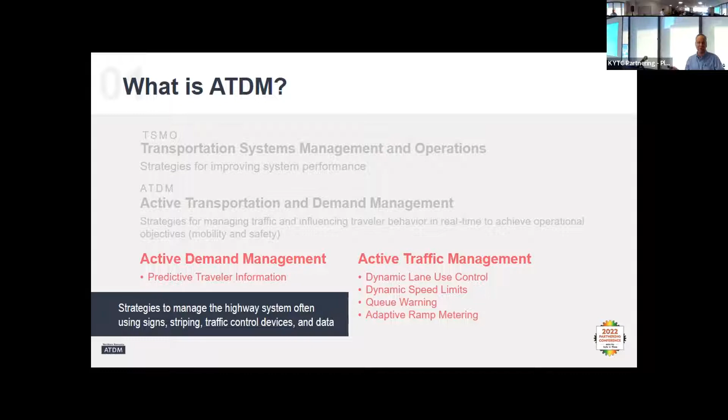Who in here has heard of TSMO before, at the very least? Excellent. Who has heard me or Sawala talk about TSMO? Okay, the message is getting out.

This is very exciting. So the overarching question of why we're doing this can kind of be distilled down into the Department of Highways' operational goals, which is to promote safety in all decision making. That's what we want to do in every aspect of the Transportation Cabinet's work — increase our economic opportunities and the quality of life of the traveling public. We want to have a relationship with the people who are using our roadway system. That's usually a benefit, but we want the roadway system to perform well.

We don't want it to be underutilized. Some of our segments are overutilized. Does that all make sense? Why this kind of stuff is important? Okay.

One of the other biggest problems we have is that we have limited resources. And we're kind of boxed in a lot of different ways, especially on the interstate system. Anything we do on the interstate system tends to be more expensive. And we are, in certain areas, very boxed in by right-of-way or other constraints that make potential solutions like just adding more lanes not very feasible.

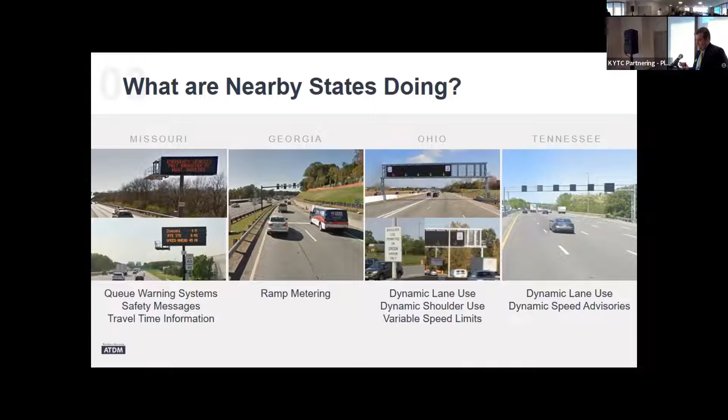You get fancier as you get into Ohio and Georgia with ramp metering. The I-670 smart corridor there in Columbus has these really fancy, expensive overhead gantries in the middle that tell you what the speed limit is, what lanes are open, which ones you can use. They also have things like variable speed limits, dynamic lane use, and speed advisories.

Now, like I said, Kentucky's got some exciting things going on in this space. Did anyone listen to Jason talk about the TSMO program plan this morning? Hands, please. Awesome. So you can see that this kind of thinking is really starting to ingrain itself into the KYTC process.

Also, this highway plan has approximately $7 million per year in various funds for TSMO and ITS, Intelligent Transportation Systems, which is a dedicated pot of funding for TSMO. That was something that really didn't exist before.

Of course, we have deployments already with our travel time displays, both run by TRIMARC and run by KYTC. We've got this study that we're doing, and we're really starting to integrate TSMO into project thinking, both in the planning phase and also in the design phase.

There was a request for: can we look at a reversible lane on an arterial? Can we do a managed lane on an arterial? We have queue warning systems, and intersection conflict warning systems come into this as well. So big projects, little projects, this TSMO stuff is coming into it.

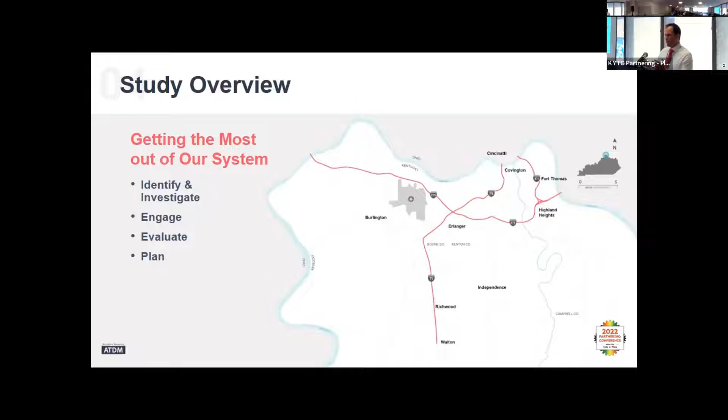Northern Kentucky has a unique situation where there are a lot of small patches of cities right along the river, so having them included was important. We evaluated some of the options and potential benefits, and identified the plan for what the next step is—what's the easiest thing to do today?

Then you get into construction, and after construction there's a whole bunch of testing and integration you have to make sure is going on. It's got to work, it's got to do everything you said you wanted it to do, and you have to verify along the way. It's not as simple as putting pavement down, turning around, and seeing what happens.

Some of the goals we had for this study: reduce travel times, reduce crashes, improve travel time reliability. We're really looking for a favorable benefit cost ratio so we can show why we need to continue investing more into these strategies.

The considerations we had to be careful of are the physical infrastructure—what's actually out there in the system from a connectivity standpoint, communications, power, existing infrastructure—and how much money we have. You can't just put this in, walk away, and come back in 15 years and say the pavement condition's still good, we're good to go. This is a daily thing you have to be on top of, thinking about, checking on, and making sure it's still doing what you intended it to do.

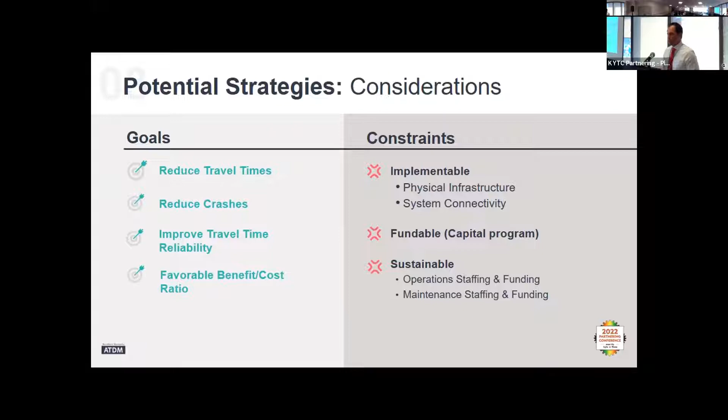Now I'll run through the range of potential strategies we looked at. The RFP had a pretty long list that we tried to narrow down—I called it everything but the kitchen sink when I saw it, and hoped we didn't have to do everything because it might not make sense. But we used that funnel and moved it down the process.

The first one was dynamic shoulder use—using electronic signs to dynamically utilize the shoulder for a travel lane. Normally this is done in peak period conditions, not all the time; it's really just when you need more capacity. But you need to understand how you're going to do it—is it going to be a smart lane with a dynamic sign, or a static sign?

We have an example from Georgia, where they have a static sign that opens the lane from 8 to 10, and then again from 4 to 6. Over in Washington, they have a dynamic lane use with a green arrow, red X type system. All of these require similar things: communication, power, and thought on where they're placed along the system. You have to give people enough time to make an informed decision and do something about it, so you can't just throw these everywhere.

You have to think about how much time people actually need, how much spacing there is before they need to make a decision, so it's something people can do comfortably—because this is a lot more information being thrown out there. We try to make it as seamless as possible, but that can be a challenge, especially in some urban corridors.

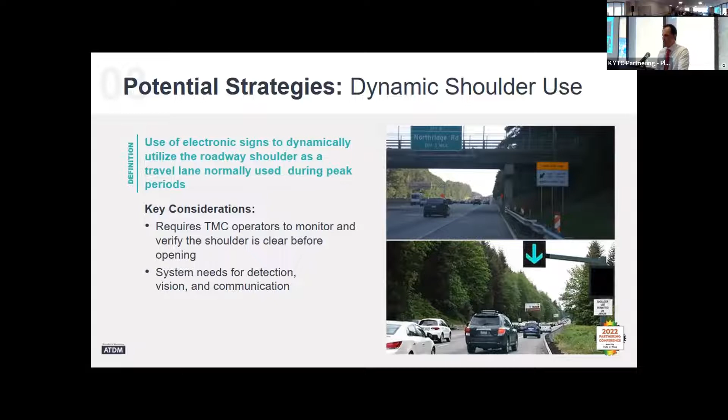Ramp metering is another one that uses traffic signals to basically break up the flow of vehicles entering the freeway. It creates a safer merge condition and can just help smooth out vehicles entering the freeway and the flow. I like to talk about ramp metering.

Just think about the plumbing inside your house. You can't put too much on at one point. You have to make sure that the system can handle what you're putting into it. The whole point of ramp metering is making sure that you're monitoring what's going in, how it's going in, so you don't have a backup.

Some of the biggest concerns with ramp metering that you have to be aware of are the geometrics that come with it. What's your acceleration distance? What are your required acceleration distances? Hint, the Green Book requirements are not exactly what you need to be doing when you're thinking about ramp metering. So look at what a peer state has done. There's a lot of states that have gone out there and come up with their own acceleration distances that are needed for installing ramp metering.

The discharge, how many lanes do you need? You really have to understand how many cars are coming onto the ramp, and it's not at an ADT level. It's at a 15-minute, 5-minute interval. You have to know when they're coming, how many are coming, so that you can control the situation.

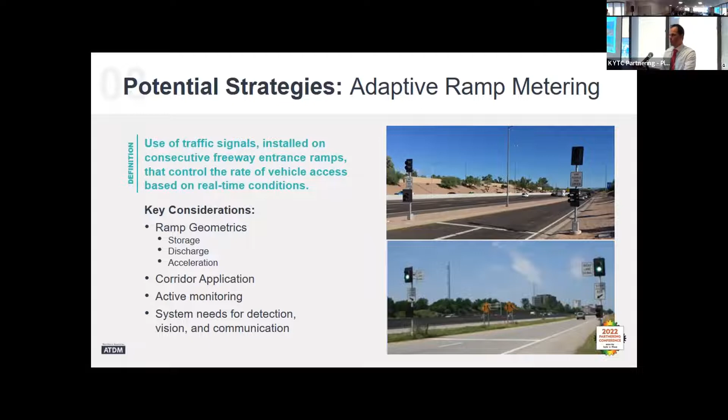And then corridor application. The biggest thing that I see is a lot of people think, oh, well, I can just put ramp metering in a couple spots. You really got to, it's a system-wide approach. So you want to look for an opportunity to apply it across the system so that you can gain that benefit of moving people along the whole system. And again, communication, vision, cameras, and power are all things that you got to look at right away for this type of system.

Dynamic lane use control is another one that we had, and it's very similar to dynamic shoulder use, except it's really monitoring and providing information above each lane on the freeway. So where this really comes into play is if you have an incident blocking a lane, providing people with the information a couple miles in advance, and every mile or so as they're approaching it, or half mile depending on the spacing, is going to allow people to get over and out of the way instead of just running into the back of the incident.

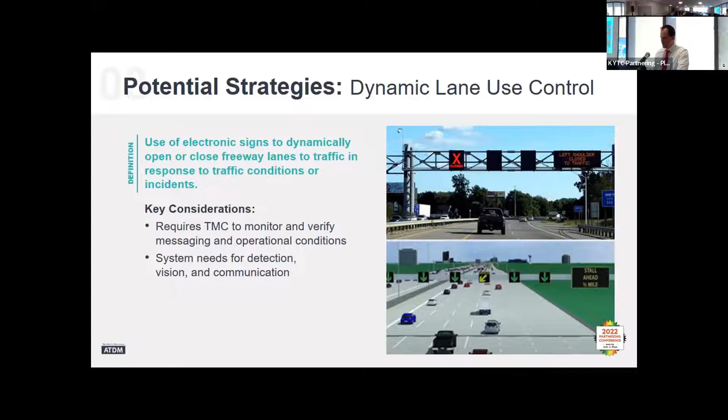In certain jurisdictions, they also include speed, and that's another one we're talking about two from now. So queue warning is the other thing, is just using the signs that you have out there to let people know, hey, there's an incident, just be aware.

Understanding where these are placed. Again, you don't want to have one of these every 20 miles ideally, because incidents happen along the way. It's really critical to understand the level of deployment that you need to have in order to get the message across to actually make a change for the safety of the system.

This is another thing that we looked at, and the common trend you might be seeing here is, man, Chris, Rob, you guys are telling us a lot of stuff that includes a DMS, fiber and power and communication, maybe some cameras that verify things. That is a lot of what we can do to lay the foundation and build from there.

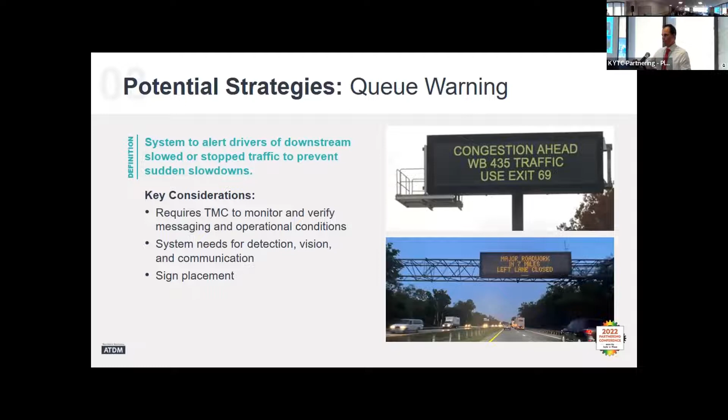The dynamic speed advisories, another one that we looked at. The point of this system is really just to mellow out flows along the freeway. It's another way to tell people, hey, there's a change in the condition ahead. There are also two types of these advisories. There's a dynamic speed limit, which is controlling and could be enforced if you had legislation. There's also the advisory piece, which sometimes comes in from a road weather management situation.

If you had a curve, or maybe a really steep downhill slope on I-75 going into a river, letting people know, hey, slow down. The conditions normally are, 65 is fine, but it's 9 o'clock. Let's really target 45 miles per hour because there's just so much going on.

So again, same thing here. It's all about placement. It's all about communication, power, and just thinking through where you put these signs.

Another one that we were looking at was comparative travel times. One of the really nice things about both Louisville and Cincinnati is the options that you have available.

There's interstate options, and there are also significant arterials that run through these regions that you could use if you had an incident on the freeway. So providing that information and really looking at what are the normal travel patterns, what are the alternative options that could make sense. These types of signs are really about getting information out to the traveling public, letting people make an informed decision. That decision might be, I need to turn around and work from home because I don't want to drive 60 minutes to get across the river.

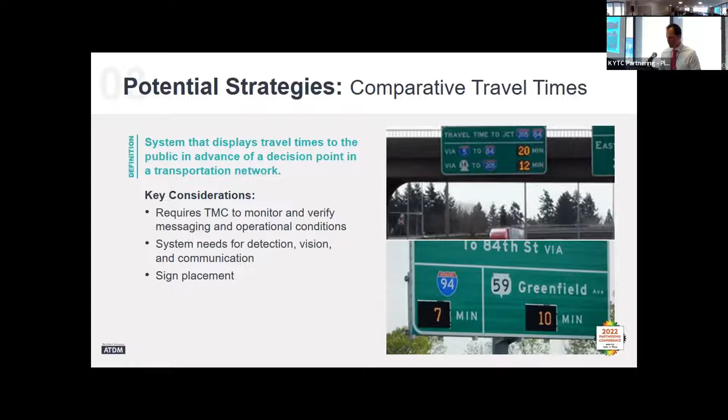So of all those strategies, and a couple others we had, the ones that moved forward were the comparative travel time, the queue warning, the dynamic shoulder use, and the ramp metering.

The ones that were limited were the dynamic lane use control and the speed advisories. The reason for that is some of those limitations—mostly the dynamic lane use control and speed advisories—require a significant amount of infrastructure we don't currently have, from overhead gantries at half mile to three-quarter mile spacing, depending on the policy decision. It's just a lot of money.

But what we do have currently in the system is some DMS out there. We're used to working with them, and we've actually got some pilot projects that TRIMARC's been working with from the queue warning system on I-75. So we're really looking at identifying things that could easily grow from there.

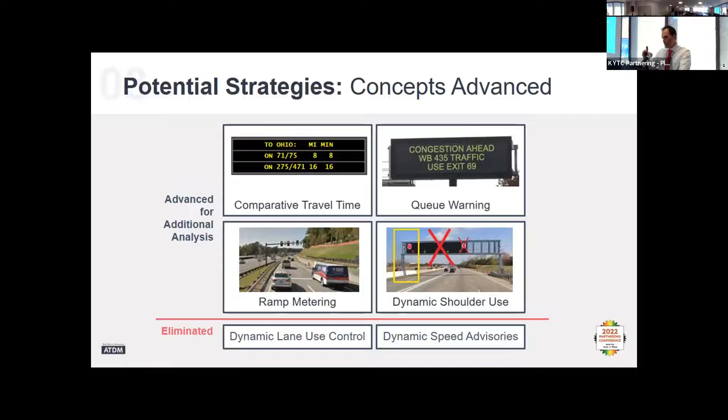But the biggest thing with this study that's very different from other studies—and actually very similar to what the previous presentation was on with HSIP—is the amount of data and the level of data you get into when you're looking at these types of things.

Again, ADTs are not going to work when you're talking about an operational condition in a peak period. We've got to get down to, like Steve was talking about, the big data. We can see at two-minute intervals right now with the probe data we have an identification of, hey, we've got a problem. For right now, we can use that if we can integrate it into our ATMS to provide information to these signs, and that will give us an immediate benefit.

What do we need to do right now? We just need more signs, in the right spots, and we need to be able to expand the demonstrations we already have. When that provides benefit, it's a lot easier to say, hey, this has worked really well—here's the benefits we have.

We have fewer secondary crashes. We have better travel time reliability whenever 75 does get shut down, because people don't just go to 75—they use 471 and 275, or the streets in Covington and Newport. So these are the types of things that, using the big data, understanding what's happening, having that baseline information, but also really looking at operational data when you have an operational issue you're trying to fix—that's a little different than your normal traditional corridor planning study.

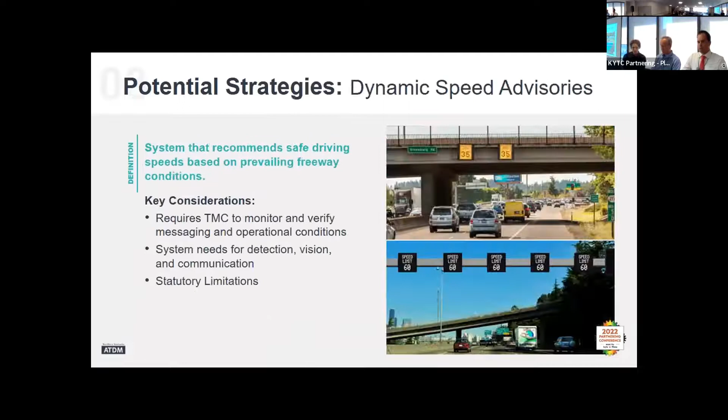Another thing that Jason talked about, which I think is critical, and why we've kind of taken the approach that we've taken through this study, is credibility. When you're putting in a system, having the system be credible is critical to people actually using it and changing their behaviors based on it. So that's one thing we're looking at: let's expand what we currently have, what we know works well, and just put it out there more, so we start that baseline of what is credible and what's working.

You can think about your questions and I'll answer them later. Thank you. Yep. Thanks for that.

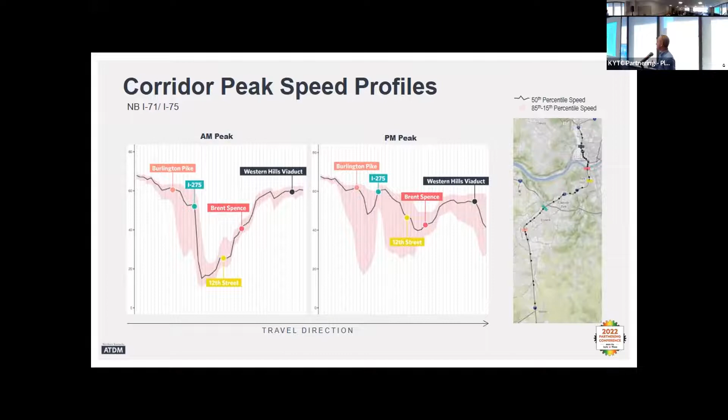All right. So yeah, we've talked a little bit about the data, and there is the data that we use, and there's the data that would run the systems. This is some of the data that we use. We use speed data that shows speeds on the approach to the Brent Spence, morning and afternoon. In the morning, it drops off, actually increases as you approach the bridge. In the afternoon, you see there's big pink bands, which shows that it's unreliable. You really don't know what you're in for in the afternoon. It could be that you're going to go 60. It could be that you're going to be down at 30 or 20.

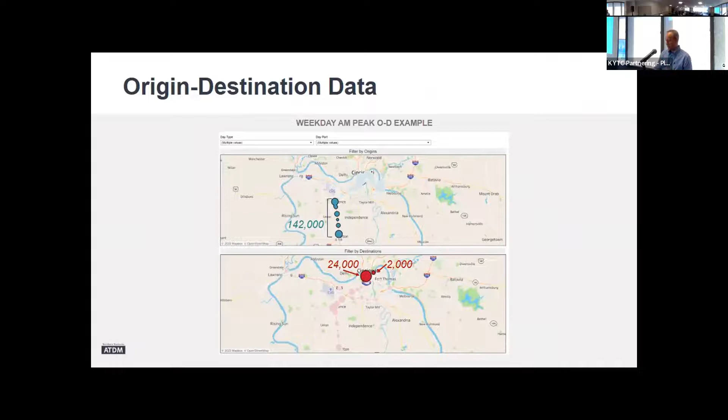So we looked at that information. We looked at various maps. We looked at where all the crashes are. We looked at origin destination information, which is now even more available here in Kentucky to us, which is fantastic. So how many people actually do what Chris was just talking about? They actually divert over to 275, 471 instead of going over the Brent Spence. And we have all of that information, and that factored into the analysis, along with a lot of other things that we won't go into all the details, but feel free to ask questions at the end if you're interested.

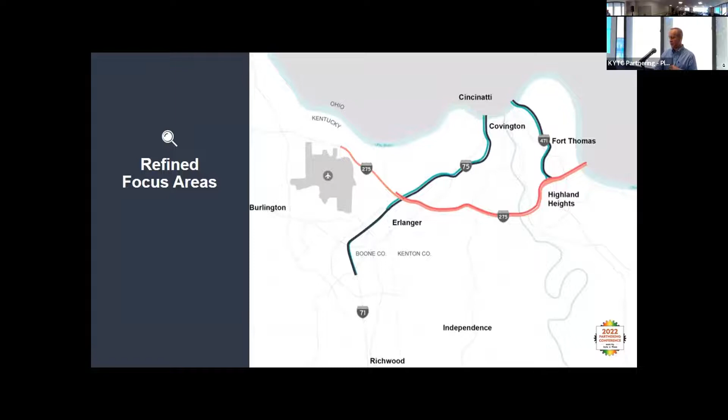And that focused us. We were able to focus: okay, this is the part of the system we really need to pay attention to. This is where we can make a difference with these kinds of deployments, working with what we have out there already, and kind of building on that.

And this is the deployment that we ended up examining. And it is not super complicated. It's basically 4 mainline dynamic message signs on the approach to the 275 interchange, and then some arterial dynamic message signs before you get on the system, so that they can also give you information that would be useful in making routing decisions. And in particular, all the orange locations, the main line, and then the interchanges near the system interchange, those would be a phase 1. That's where we really want to influence people's driving behavior. And we looked at that origin destination information to find out more, and we were able to make some reasonable assumptions about how we could influence people's behavior.

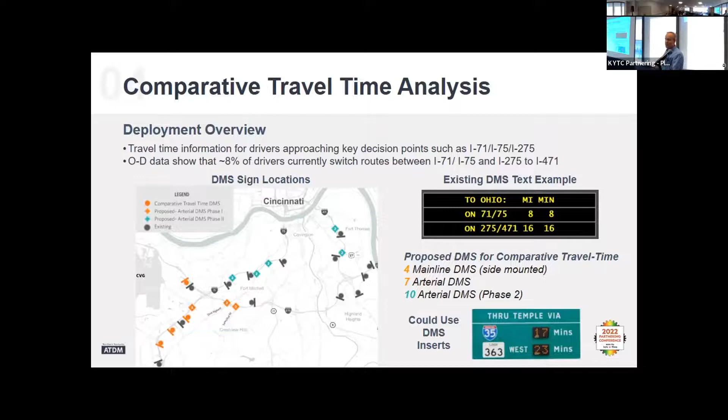And we also show that this can be done using full dynamic message signs, upper right, or you can do something that just has inserts, much lower cost. So we've assumed for this study the high cost; you could do it much less expensively than I'm about to show you, and get an even better benefit cost ratio than the 8.8 that we've already got. And we tried to be conservative when we looked at all the benefits that we can get from communicating this information to drivers. And we really just focused on peak time, really the AM peak, but there'll be benefits all the time, whenever there are incidents at various times, when you don't really know what you're expecting, again, in that afternoon time period and even on weekends.

So from a feasibility standpoint, this deployment doesn't require any right-of-way. The data is already available. It's like Chris was saying, it's signs, communication, power, basic stuff, so that we can communicate with our customers better about their options. And the cost is a little over $3 million, and we think that there's substantial benefits. We looked at 10 years of benefits. We think you're basically going to recover it in a year or 2. It's not going to take long to recover that. That's why you get such a high benefit cost ratio. So that makes sense to move forward. And again, we used the high end cost for those. It could be even lower.

All right. So queue warning is the next thing that we looked at. Oh, I want to just say, so this is already being done up there, but right now, what happens is when there's congestion, the message board that displays this information switches to safety messages.

And so it doesn't show the message when you kind of need it most, because it's got a higher priority safety message that it needs to display. And so what we're trying to do is we need to have dedicated signs for this particular deployment.

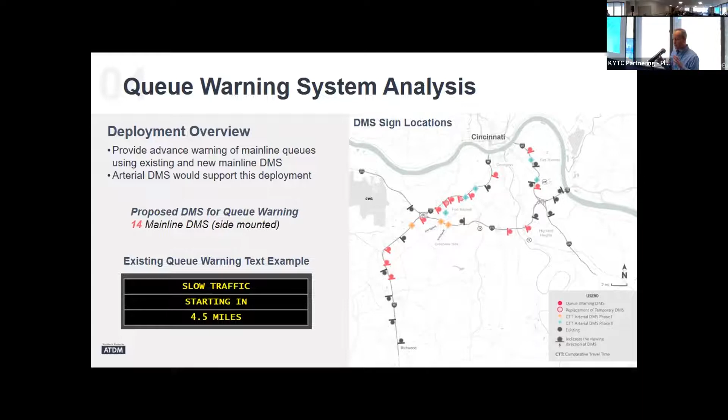From a feasibility implementation standpoint, again, no right of way, the data is already there. We're already doing this, but we want to do it better, and we want to do it more universally in all the areas where there is the congestion. And you can see again that the cost is around $5.5 million. And with the benefits, both safety and travel time benefits, we think the benefit cost ratio is 5. It's going to pay for itself to the users fairly quickly. And neither of these deployments are beyond something that we can do now.

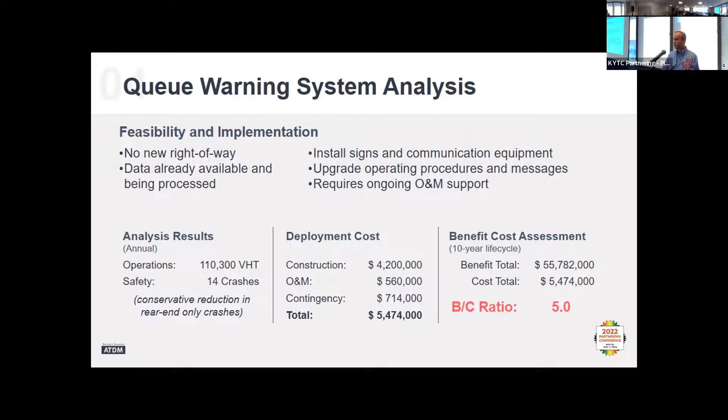Now I will say both of those deployments, I've kind of painted the bright picture. They do require ongoing maintenance and operations. You have to pay attention to them. They're going to need some ongoing attention and investment, but it is not overly large. So, all right, those are the first 2. We see those as pretty much low-hanging fruit to improve this system.

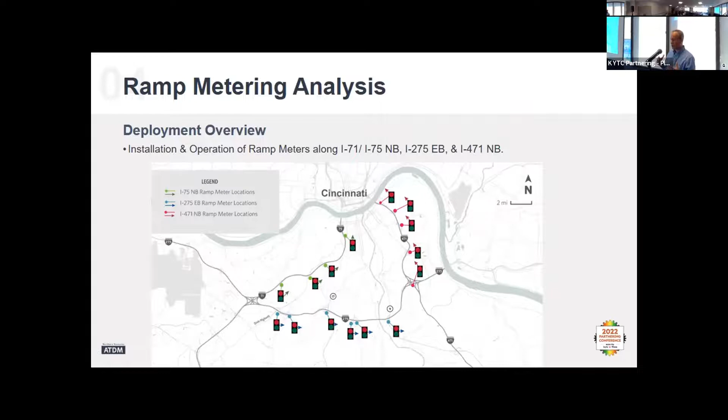The third one is ramp metering. And this we looked at 71/75 northbound, 471 northbound, and 275 eastbound. Those were the directions where it appeared that it could offer the most benefits. And when we ran through that analysis and looked at, again, how it would impact the flow and safety, we determined that there are definitely benefits, especially on 71/75, that the cost is roughly $3 million and the benefits are substantially greater than that over a 10-year time period.

We also did look at the feasibility. So up at the top, we looked at the issue of queues. It's very sensitive. It's a real issue. And we looked at the potential for widening the ramps. You would likely need to widen some to 2-lane ramps, like the figure on the right, to make it work effectively and make sure that the queues don't spill back. And you'd want to coordinate signals. And again, these are things that we can do. They're tools that are available to us. And so this one also held some promise.

As far as our work, it looked like 71/75 was the most promising and had the fewest issues. 471 has some shorter ramps and short auxiliary lanes and various things, just a little bit more complex, but also feasible and also has benefits. But it might make sense to do them in that order. As we worked through this project, one of the key things was we wanted success. We definitely don't want to roll something out and have it not work as advertised. So that's why the comparative travel time, then the queue warning, and then the ramp metering, it's kind of in order of level of complexity, building off of what we have and keep building the system and keep giving drivers better and better information and managing the system.

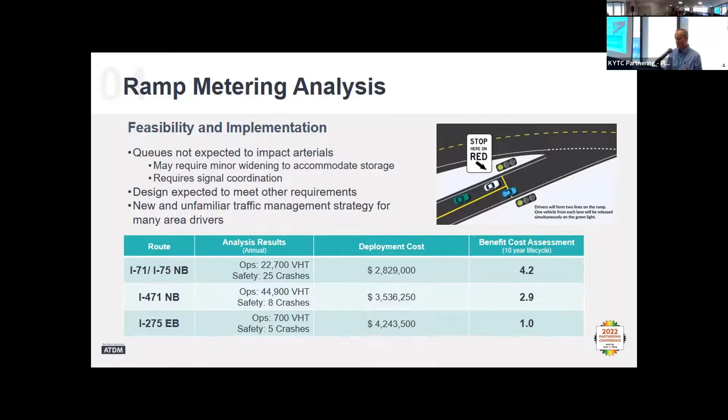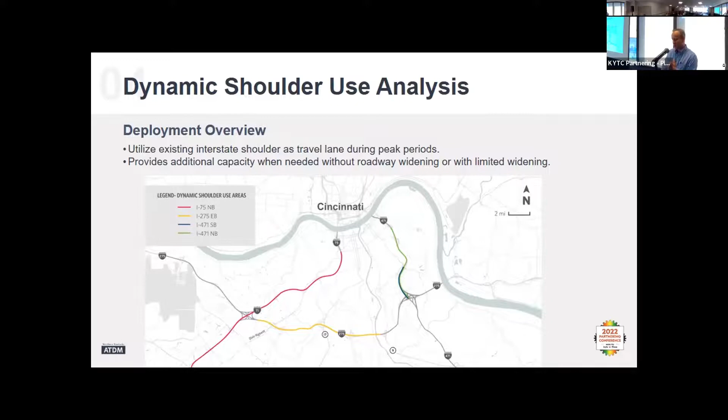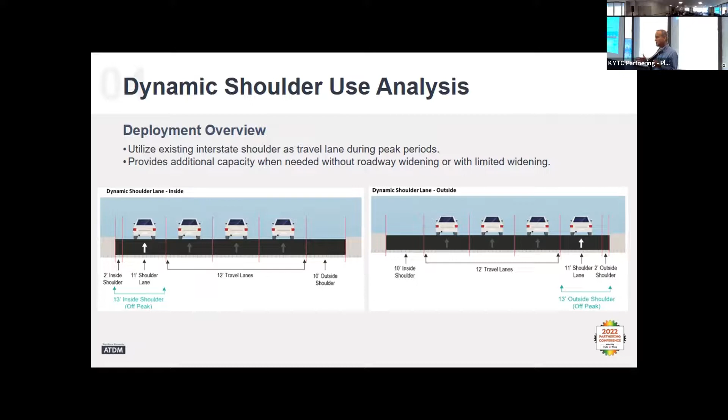So the fourth one is dynamic shoulder use. And we looked at all various locations where it would make sense with congestion. So 71/75 northbound, 471, we actually looked at even southbound 471 that approaches 275. And we're talking about literally using the right or left shoulder. You can do either, and that is the deployment. And you would use it during peak periods generally. And it would provide additional capacity with limited widening. Typically, you don't build a whole other shoulder. You use the shoulder, and you have for a certain number of hours a reduced shoulder along that shoulder use lane.

And from a feasibility standpoint, there would be a number of very tight locations. There would be locations that would require design exceptions and potentially widening to meet some minimum safety standards. So it would be challenging. It's not that it's not possible, but it just would be challenging. You can see from the cost, it would be much more costly than the other ones. It's kind of a different scale, a different level of magnitude.

And it would require, second bullet down, 24/7 maintenance and operations. You have to pay attention all the time. You have to make sure it's clear. It is unlike the other three in that it requires much more active management. And from a safety perspective, the research is fairly clear. It can decrease crashes, and I'll explain why in just a minute. It can also increase crashes.

It kind of depends on how many hours a day you operate it, because if you do some widening to accommodate that shoulder use lane, then whenever it's not in use, you have a very nice big wide shoulder. And so for all those hours that it's not in use, you've actually improved your safety condition. But then when you're using it, if you now have a very narrow shoulder on that side, for those hours, you have degraded your safety. And so the balance of those two things determines whether or not from a safety perspective, it actually gets better or gets worse. That's why we put NA for safety.

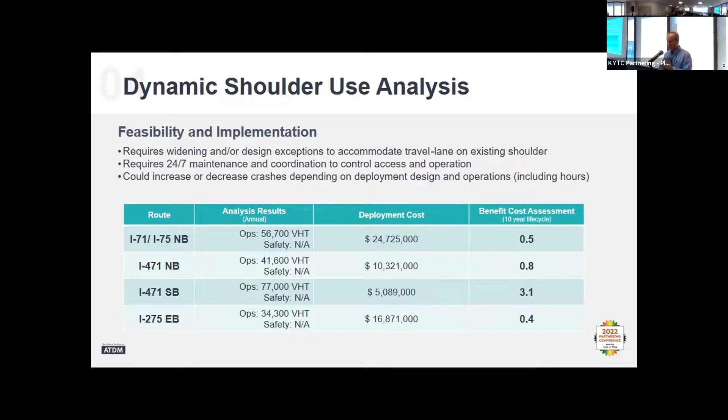So this is the quick summary. Comparative travel time, queue warning, ramp metering, the dynamic shoulder we just talked about, high cost, limited benefits. And I want to just touch on this before we end. Unlike other studies, we did a concept of operations for this. That includes looking at the current system, what's out there, what equipment, users, who's doing what, what are the policies. Then you've got to justify what you're proposing: this is what we're proposing, this is why. And then you put together the concept of the proposed system. You write some additional details. How does this work? Because again, this is not like some of the other projects that we do. It's got a lot more things that are interrelated, and different users.

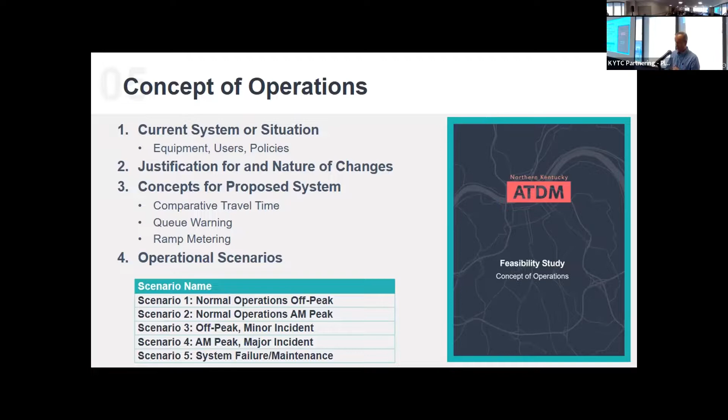And then you do operational scenarios. So I'll just pick scenario 3, off-peak minor incident. What happens? Who talks to who? What information gets transmitted? How does this actually work? And so this concept of operations outlines everything all the way to that level, where we actually run through these different scenarios and look at how the system will function in those scenarios.

All right, and that takes us back to this V diagram, which is kind of, there's a lot there, but I pulled out the next piece, which is system requirements, high level design, and then the detailed design. And that's where this goes next, if it advances: looking at those things and getting those system requirements set. So that is kind of the next phase for a project like this.

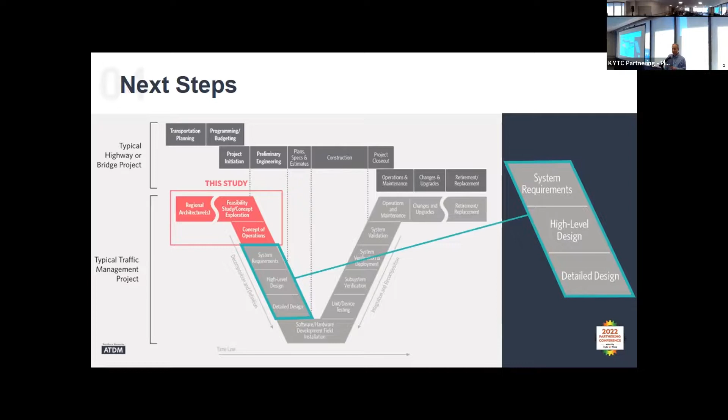As Chris talked about, you get the bottom one, which is where you actually deploy and implement, putting the equipment out there. Then you have to work your way back up, testing and checking it out before it goes live. You saw the Tennessee signs were blank - they just installed those and are getting them ready, starting that phase. So they're working their way up on I-24 in Tennessee.

So they're doing the verification and validation steps, and that is it. And so I got the 5-minute warning.

Questions? So I will. Steve, did you stand up? You want to answer that one?

So it does come down to education, education and enforcement, and driver familiarity with the system. But it is an issue. If you enforce it and make clear there are consequences, there are also risks to them from doing that. It is an issue, and that's why it requires this ongoing management and cameras. It's done up in Columbus, in DC, and a variety of other places, and you can get the compliance - it just takes active management.

So, other questions? Back on that, are there any... I don't know, I don't think so, I'm not aware of any. The biggest regulatory challenge we would have, and one reason it was limited, was variable speed limits - we cannot set variable regulatory speeds. Right now we can only do advisory speeds, which are not as effective without enforcement.